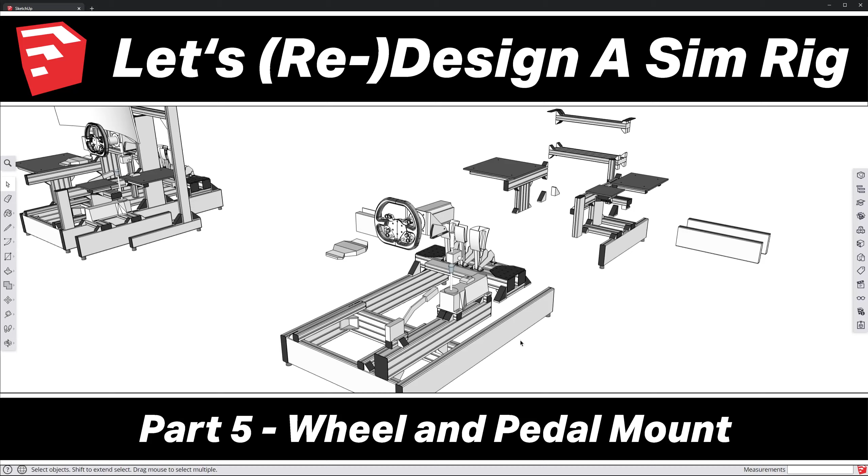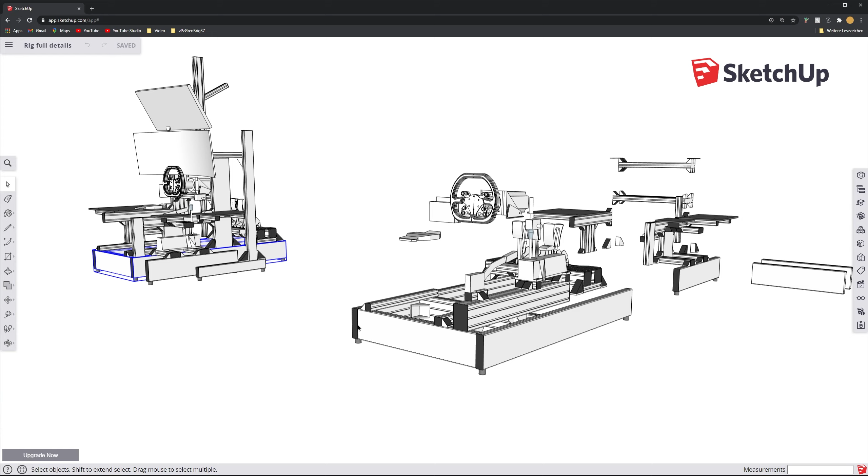Today we will be looking at the mounts for the steering wheel and the pedals. As you might remember in previous episodes, we changed this lower frame from a width of 600 millimeters to 750 millimeters. The goal was to make enough room for this big mounting bracket for both the shifter and the handbrake.

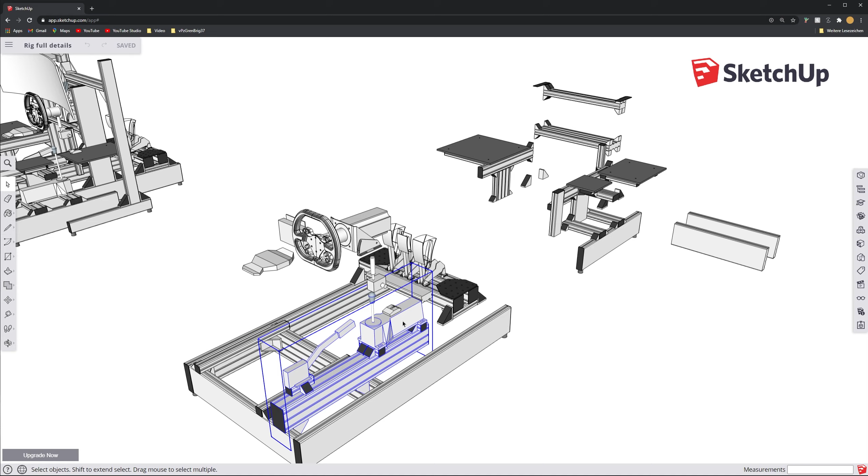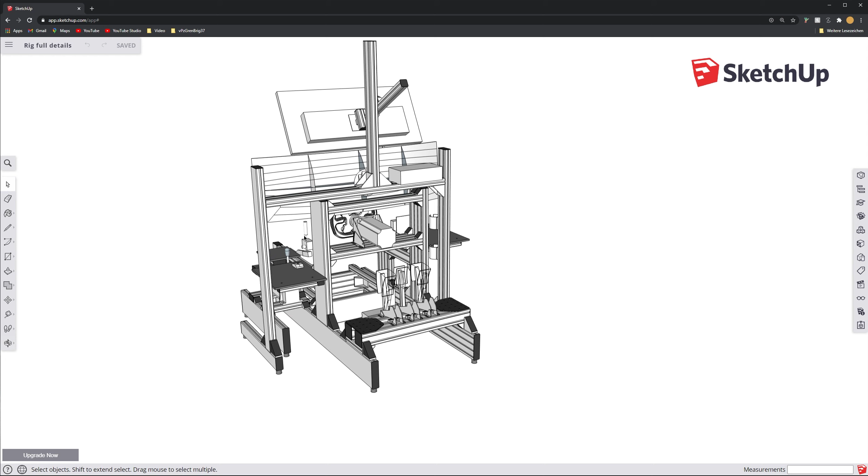Of course, making the whole thing 15 centimeters wider now makes it necessary to also make those mounts wider. For example, this is the current solution for the pedal mount, and it's too small, so it doesn't reach over here. This will need a redesign. Also, if you look here, this is the 600 millimeter width, so this is also too small.

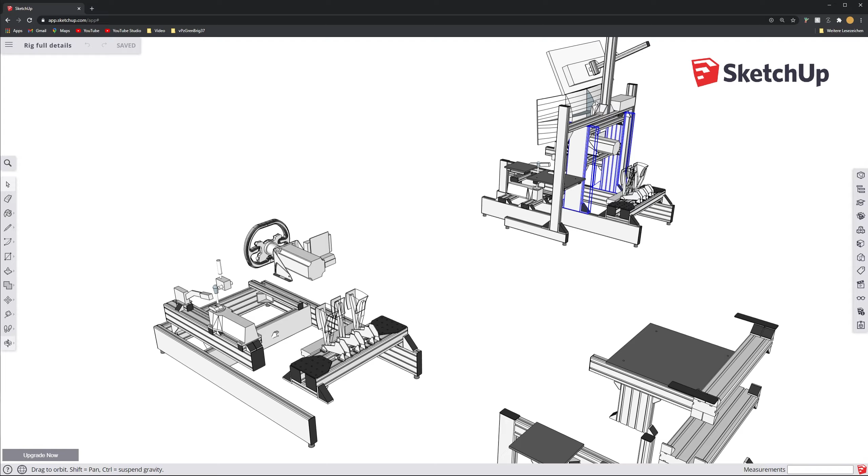Additionally, those two beams I used here are now used for this middle part. So I have moved those here, and I will now have to use basically the beams which were in the middle there for the new verticals. Those two 600 millimeter beams are over here currently.

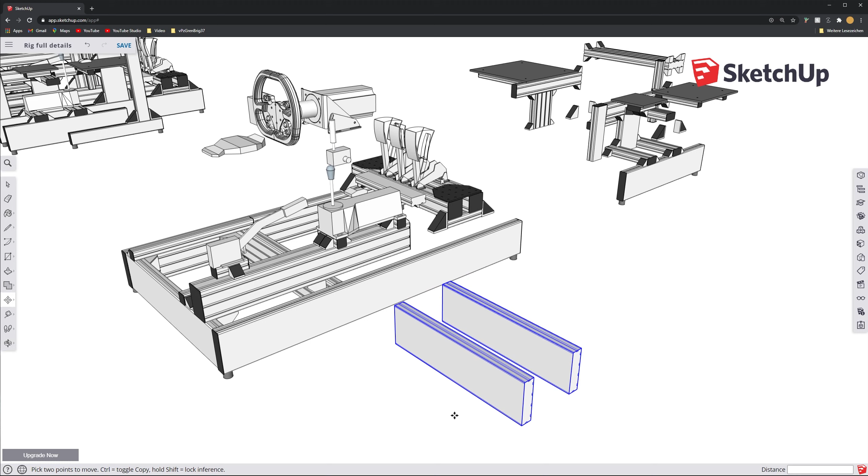I will just grab those and put them a little bit closer so they are a bit bigger for you to see. Then we will turn them around so they are actually standing upright as well. Then I will just turn them around that way, and because they have to face each other, one of them will be turned this way too.

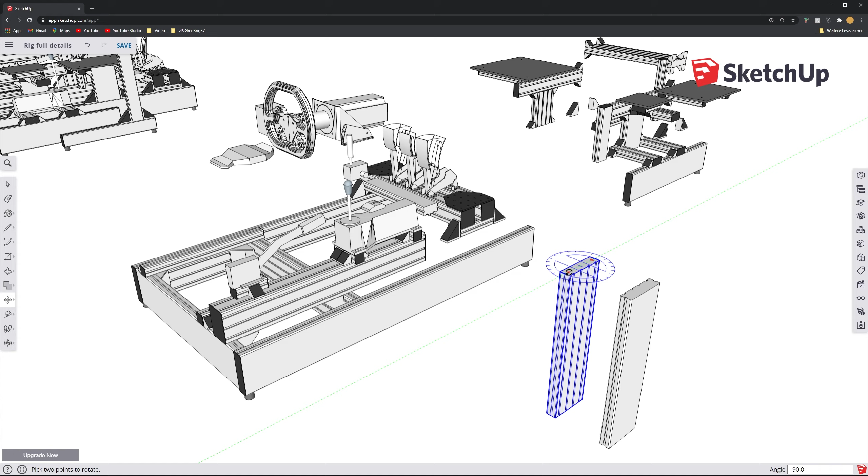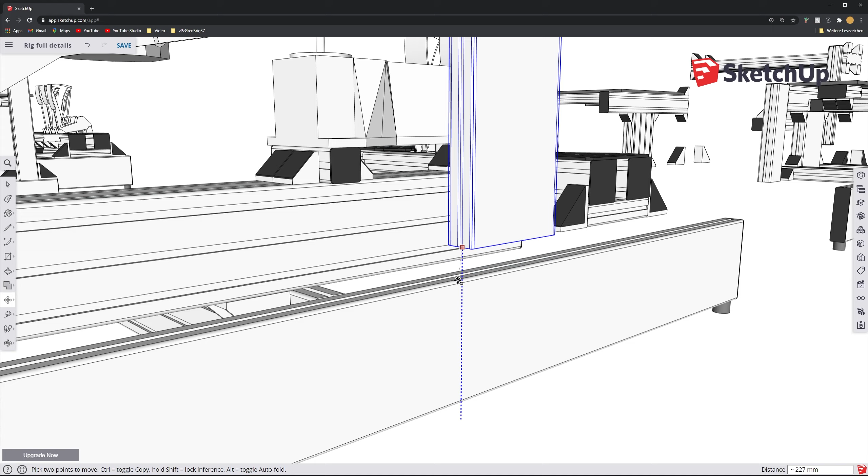Now I will just grab the first one and start moving it into place. At first I will just move it on that surface so it has the right level in the direction which goes into the screen here. And now I moved it up so it sits on top here. And I want to do the same with this one.

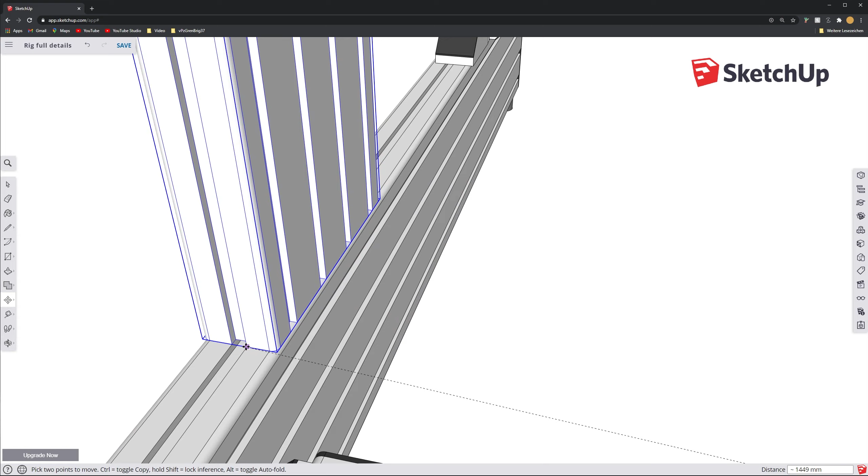Actually, now thinking about it, there is one easier way. I can just grab this endpoint and put the endpoint on that edge. So this will do both things: it will make the correct alignment in this direction, left to right, and in the correct level up, down.

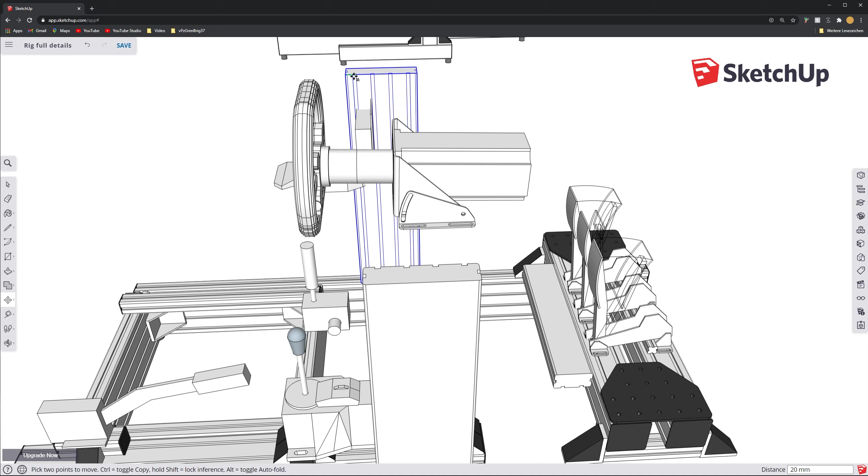Now, of course, they are not on the same level in that direction, but that is also easily changed. Just grab, for example, this endpoint and put it there, and that's done.

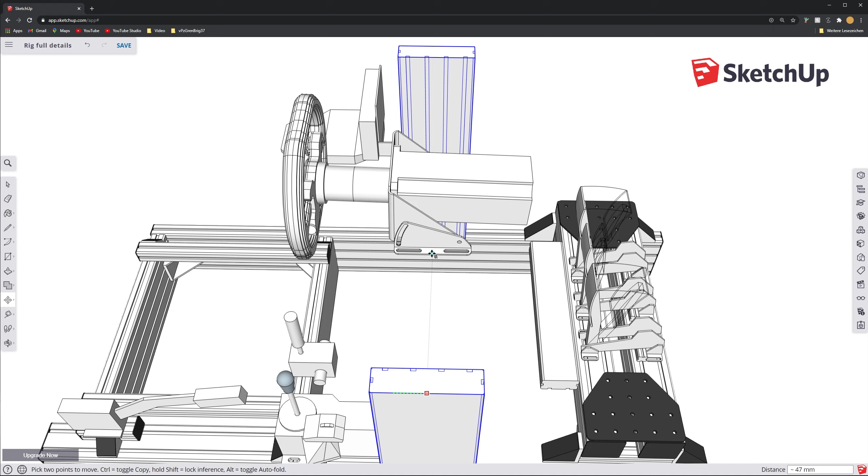Now for the next bit, I grab both of those beams here in the middle, and no, I don't want to turn them around, I just want to move them, and I will move them to the exact height here in the middle of this line.

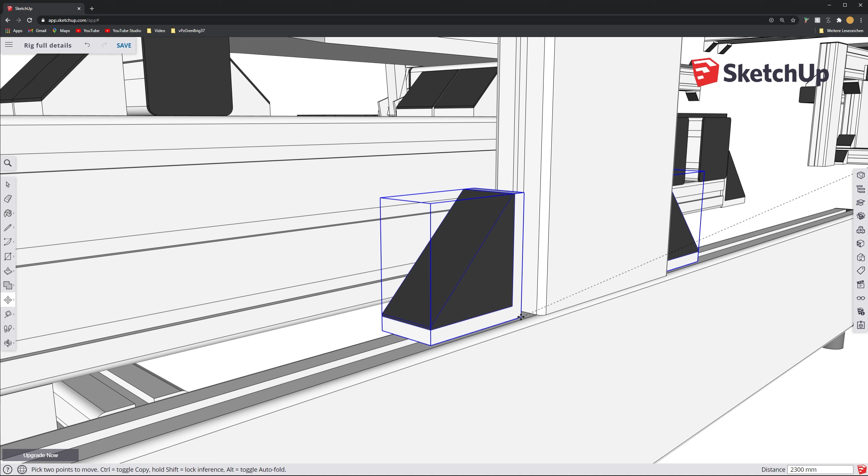So now we can assemble those two beams to this lower frame, and for that we can already use those brackets, which were also used for the same purpose before. I'll just put them on here and then align them in the center up here.

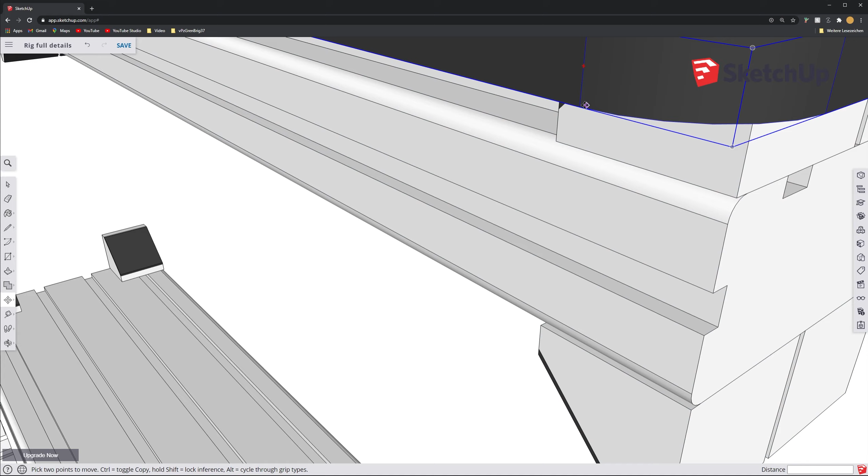And that's already done. Now that I'm looking here, I can also think about putting those end caps on. Let's try and grab that edge and put that edge on that edge. Why is it not doing it? Come on. Yes, like that.

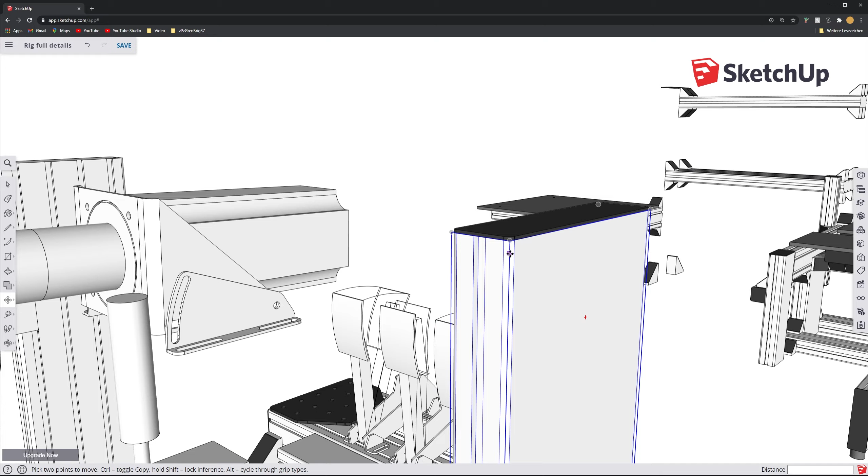So basically I aligned this lower end of that line to the upper end of that line. I will just do the same thing on the other side, if it lets me again. Grab that. Now you can see it doesn't want me to put it there. Yeah, zoomed in a bit, now it worked.

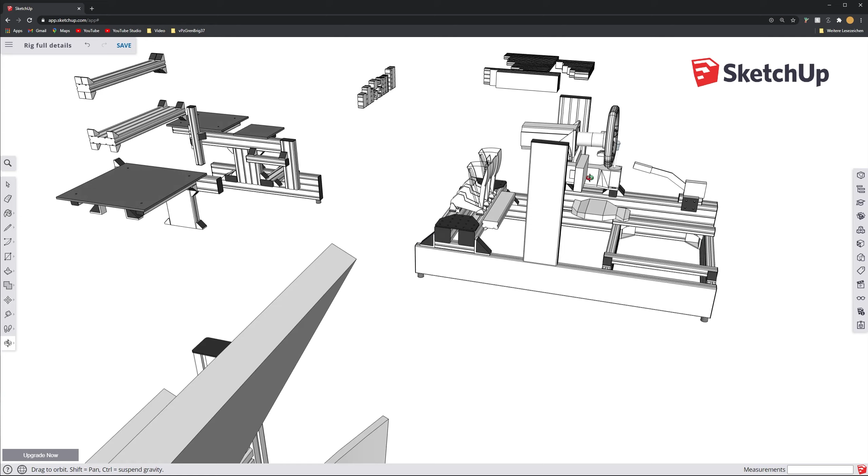And also here we have those two brackets which have to go there basically, and then again a little bit to the outside. So now they sit on there.

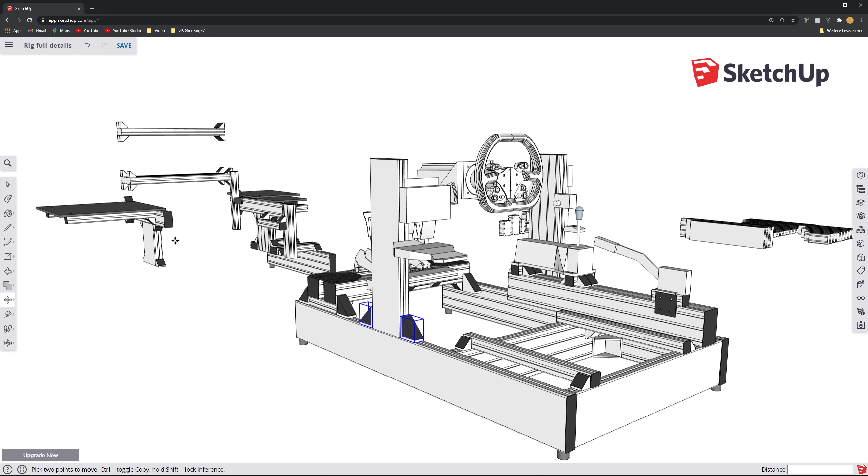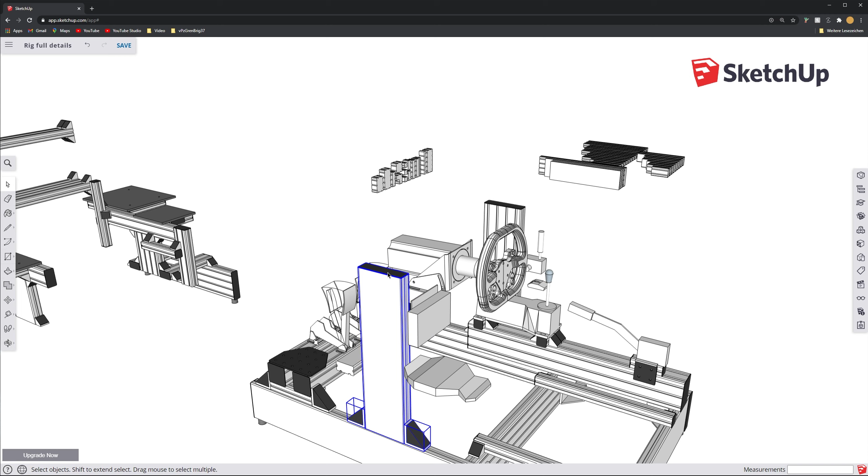One thing I usually like to do is make sort of sub-assemblies out of things like that, because these three things down here—this bracket, this beam, and this bracket—will always move together because they are screwed together here. Also this upper cap is in the same spot.

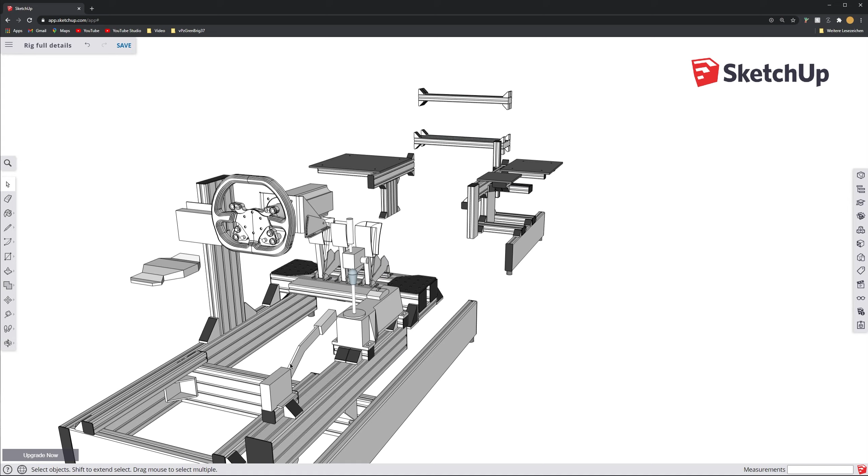For example, if you do this a little bit differently and build from scratch, then you can say, okay, now I have made one of those beams, and then I'll just do that. You don't have it here yet. So you can just use this thing, copy it, paste it, and you will have exactly the same part.

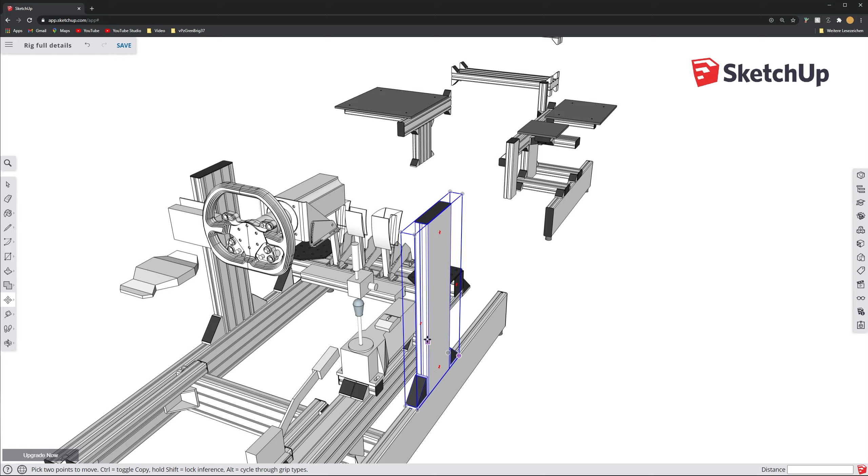Where you can easily make symmetrical pieces, so now you could use the same mount somewhere else if it's more of a general use thing. This makes your life a lot easier if you think about what makes sense to have as a subassembly.

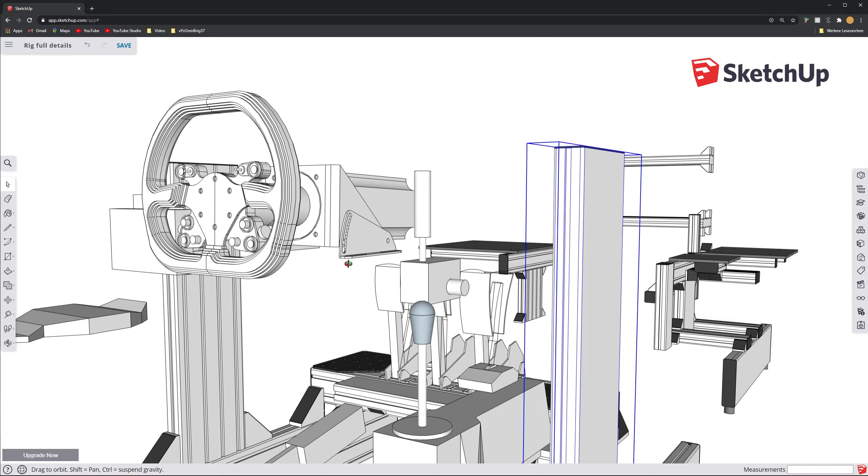Like for example, the next thing we will have to grab now is the beam which goes from this one to this one and which will hold the wheel in place, which is also this one, which is a subassembly already.

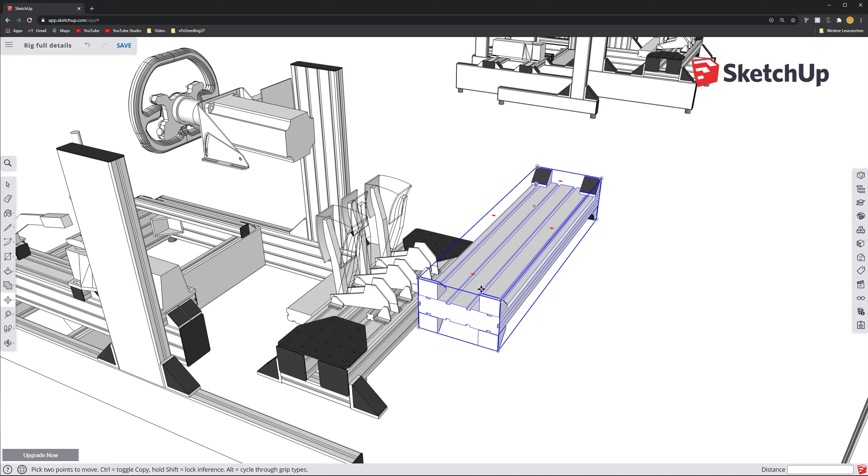So it's a group. In SketchUp, there's no assembly or subassembly—in SketchUp it's always just called a group. Here, this is a little bit special. Let's just open this entity info.

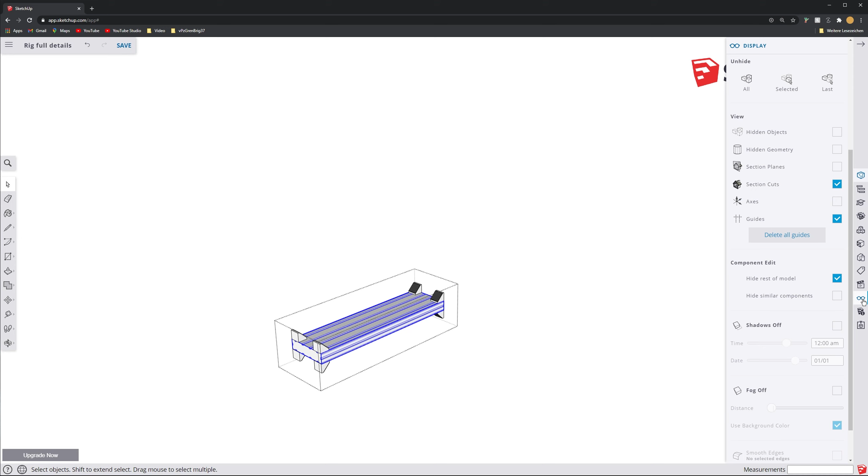Now you can see this group is there twice—so we have it here and we have it here. So we have to be a bit careful about this. This actually has some components, so this is a component where we also have two. If I would go ahead and just change this component, let's just do this to show you like that.

You can see it also changed in the other part of the model, and that's something you often don't want, so you have to pay attention to that. When I go out, I see this model is there twice. So if I want to change it here and keep it the same in the other place, I have to make it unique. Just right click, make it unique, and then you can change it.

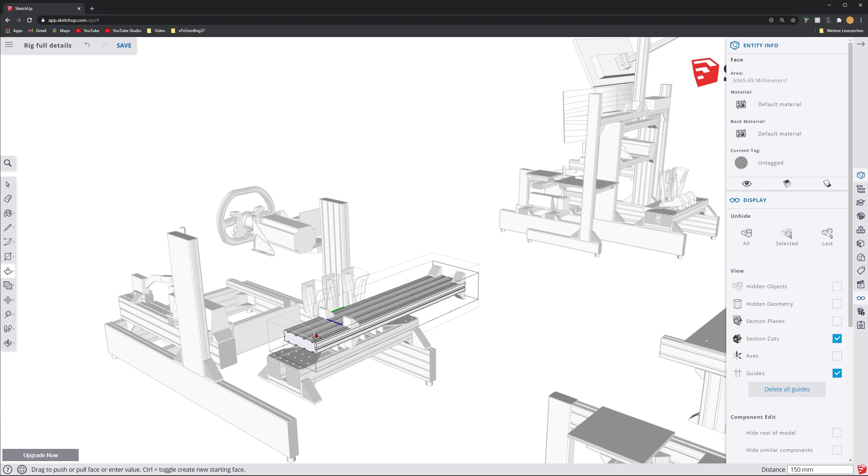As I said before, we changed the width of the frame from 600 millimeters to 750. That's a 150 change, and here we have to change it by the same amount, so this will have to be 748 millimeters. Now that it's a solid component which we only have once, I can just go in there and actually change this. I can type in 150 again, press enter, and the length has changed.

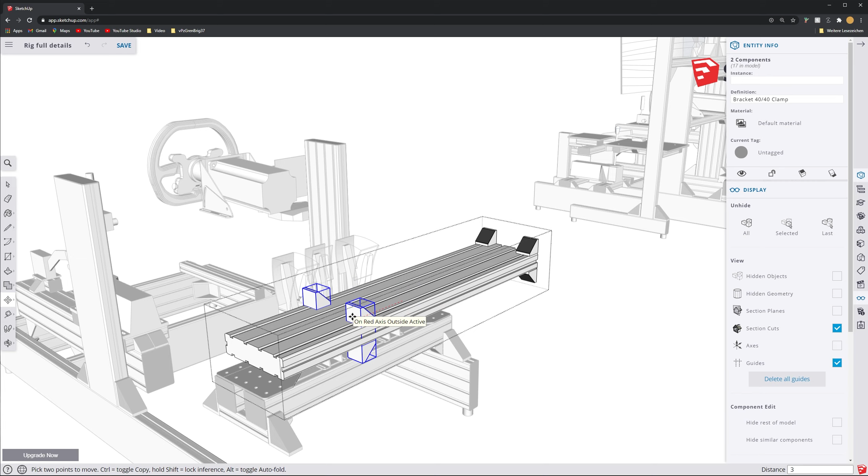Now I grab those two and I will also put those on here. And now I could, for example, say move it 150 out. No, wrong direction, other direction. Now I have to move it 300. Bam, so this has the same effect basically. I can tell it to move 150, or I can use this drag-to function.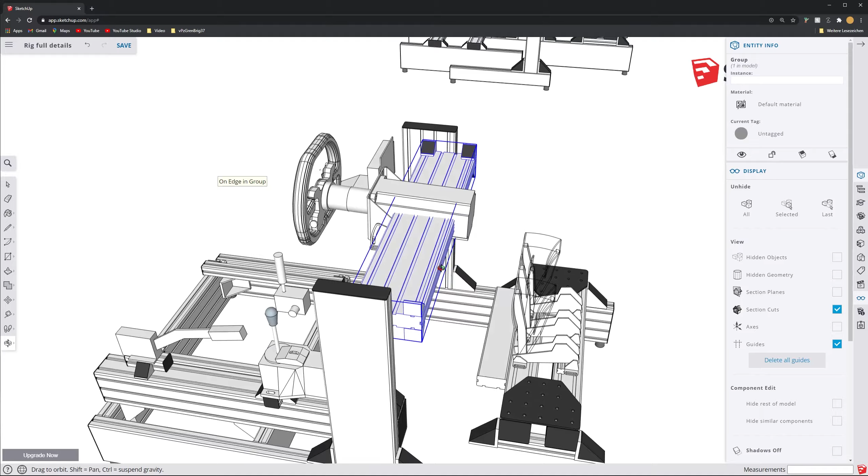Now this is also done, and I will just put it in between. I have selected this corner here and I drag it onto that edge so it's aligned in that direction well. Then I grab this on top and move it underneath the wheel.

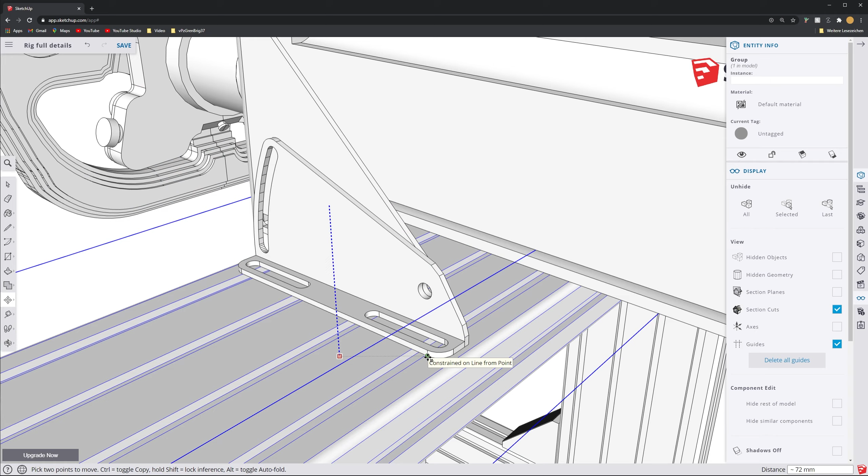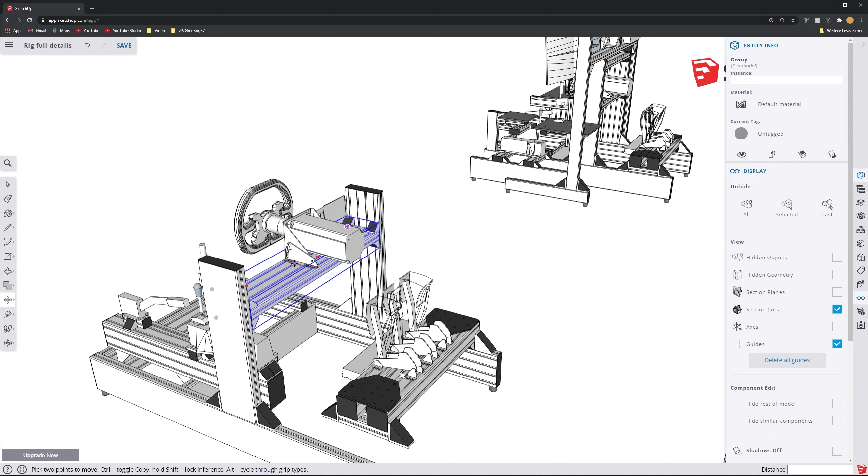Because in the beginning of the whole redesign, I just copied this whole cockpit over here, so the measurements between the wheel, the pedals, and the seat are already exactly where I want them to be, where I need them to be. So I will always just try to move the mounts towards the parts and not the other way around. I will just try to leave all the parts there where they are as good as I can.

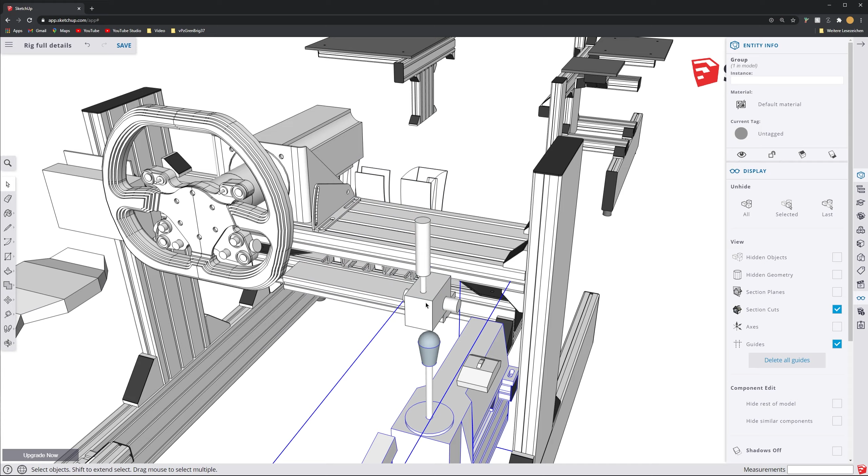Even though I won't be able to do it here, because this is just intersecting, and when you put this shifter in the left forward position here, it will collide. So this is something I will have to move, but I'm not yet sure exactly where I want to move it, so I just leave it there for now.

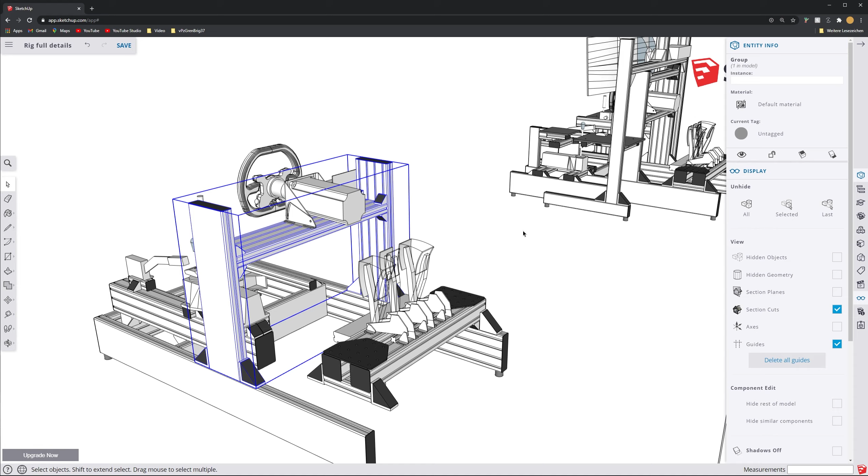So this was the part on that, and now I will also make a subassembly of that one, so make a group. And we're done with the mount for the steering wheel.

As I said, I also wanted to do the mount for the pedals, and we're good on time, so I will at least be able to start it.

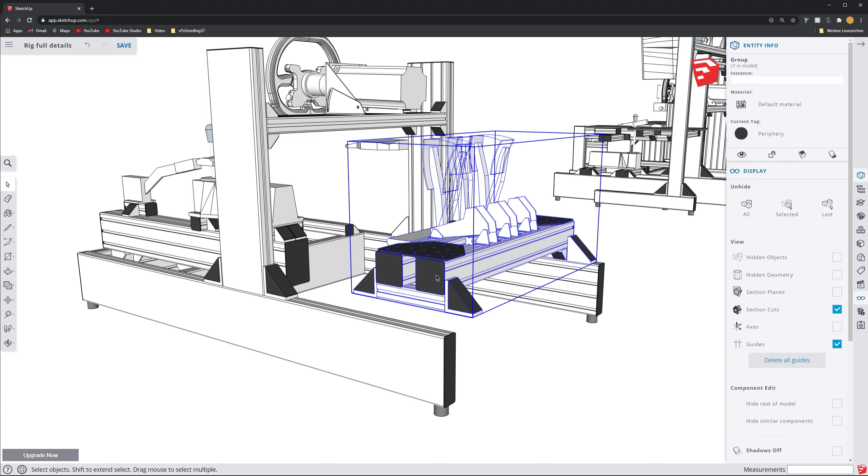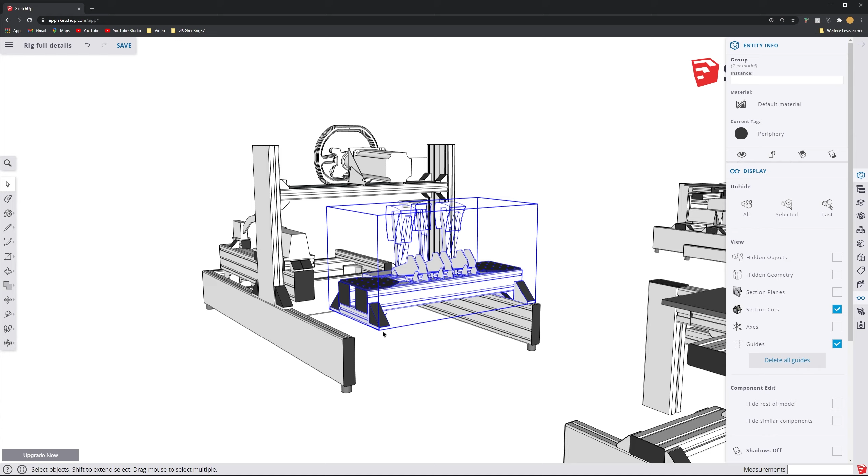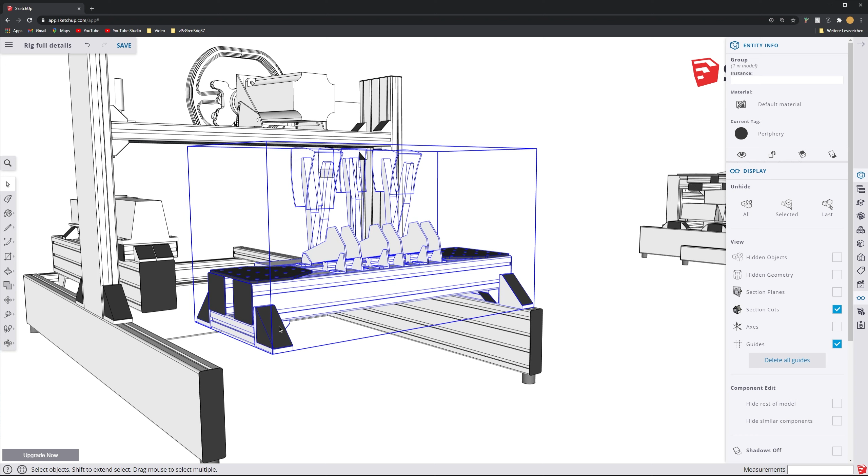And here, as you can see, this is a bit of a suboptimal solution, because at first my plan was to put this 8 centimeters above the frame height. So I had just those two beams here, which are 80 by 80. Then when I used it for a while, I realized it would be nicer to have it 40 millimeters more up. So I added this 40 profile here, and a 40 millimeter profile there. But yeah, this just adds extra parts and extra complexity, and chances to mess up during assembly when you don't exactly hit the right place, or when it's not exactly straight or not exactly 90 degrees.

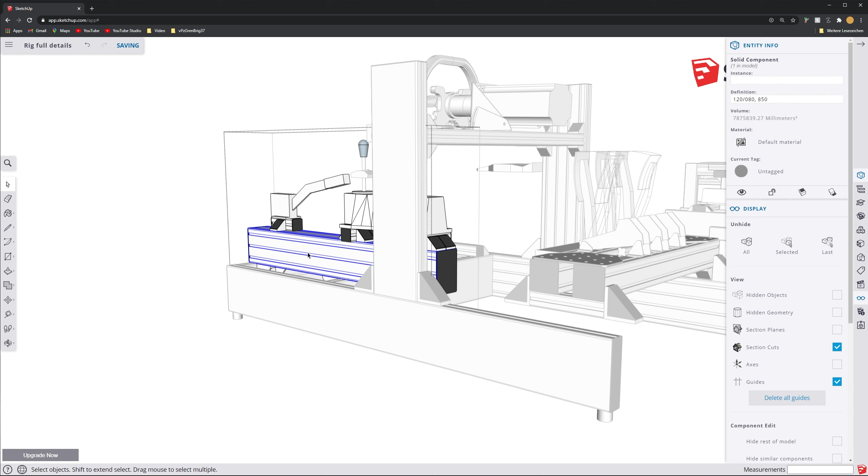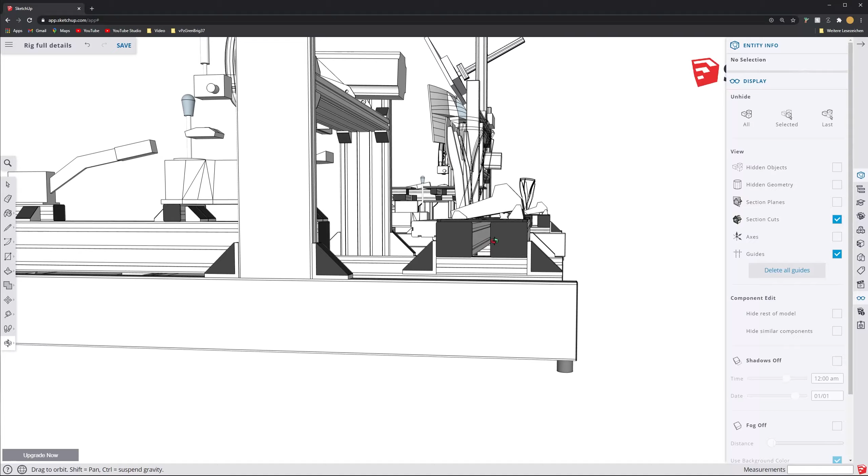So I want to get rid of that. To get rid of that, since I will already have to order this beam to change the cockpit, I will just order more of this beam and use the same dimension here. So this is the 80 by 120, and I will use 80 by 120 here, even though maybe you could do a more lightweight solution if you combined different heights and dimensions. But I will just get one big beam, or rather two big beams, so I'm on the safe side when it concerns stability, and I won't add too many different components.

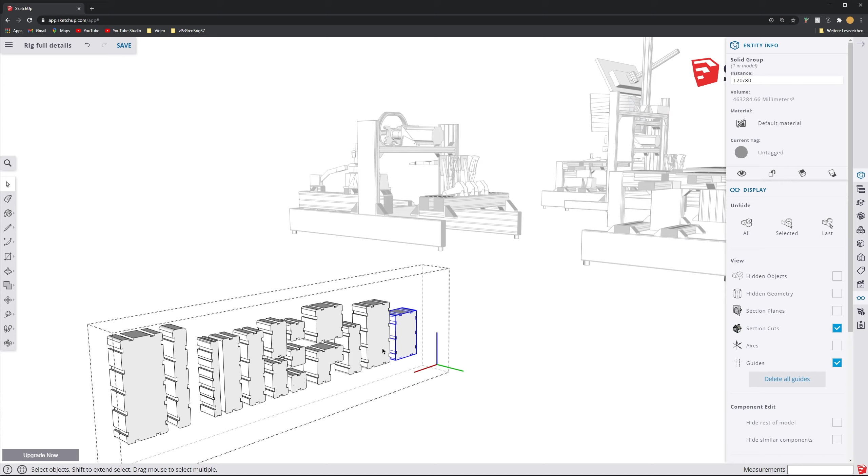But yeah, enough explanation, let's just go ahead and do it. Since I don't have this type of beam in my model anywhere, I will use this template again, and I will just copy it there.

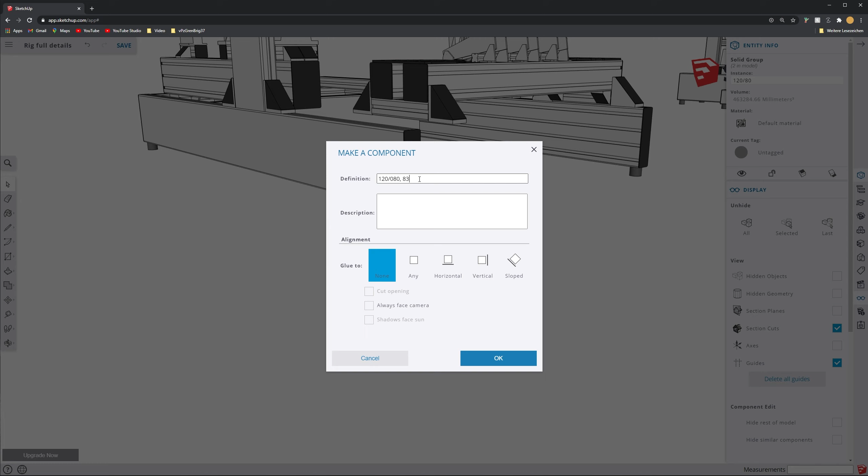Now I want this basically to span from that edge here all the way over there, so I can just quickly measure how long this has to be. It has to be 830 millimeters. Now I have to make a beam that's 830, so I will make a component here. I will give it the correct name so I can identify it, and then I can change the actual dimension.

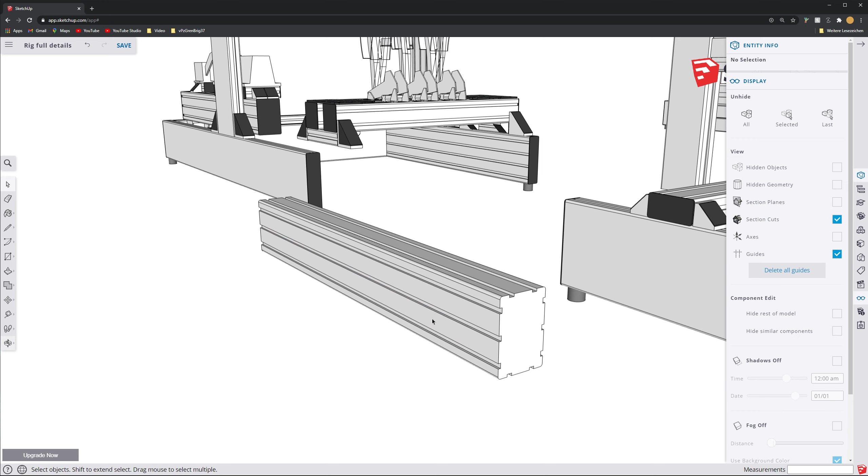This has to be extended by 780. Then you can quickly check if you did it right by clicking one line, and you will see this edge has a length of 830 now. So that's correct, that's the 830.

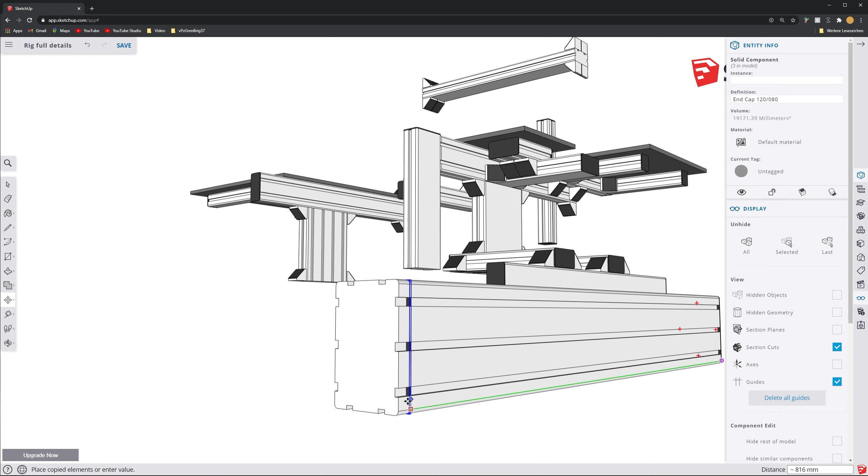Now I want to put end caps on there. So I do this right now. Grab this here, then I grab it there, copy it, go to the other end and put it on there. And I can already basically make this a group,

because I will need it twice. Copy it, paste it, and here we have it. Let's put this exactly on the edge.

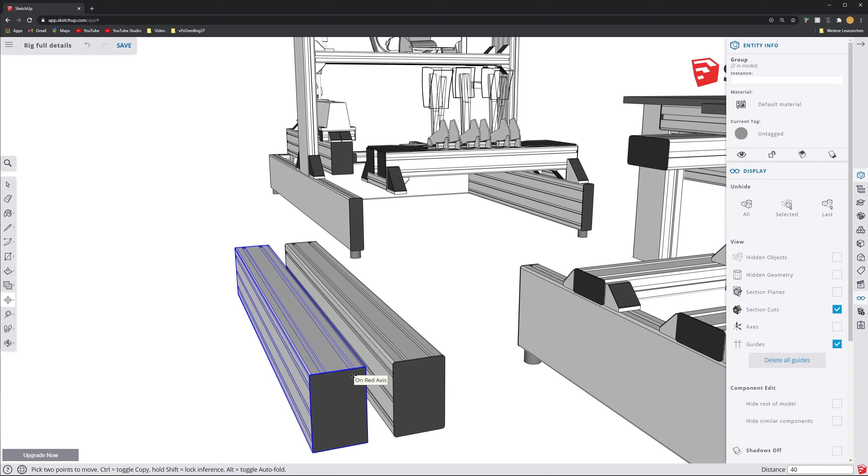And then I don't want to turn it, I want to move it that way 40 millimeters, because the gap in between here is exactly, as you can see, 40. Because everything is held in place by this thing here, and then the distance between those slots is basically not possible to mount in a different way on the profiles than having this distance from here to here, 160.

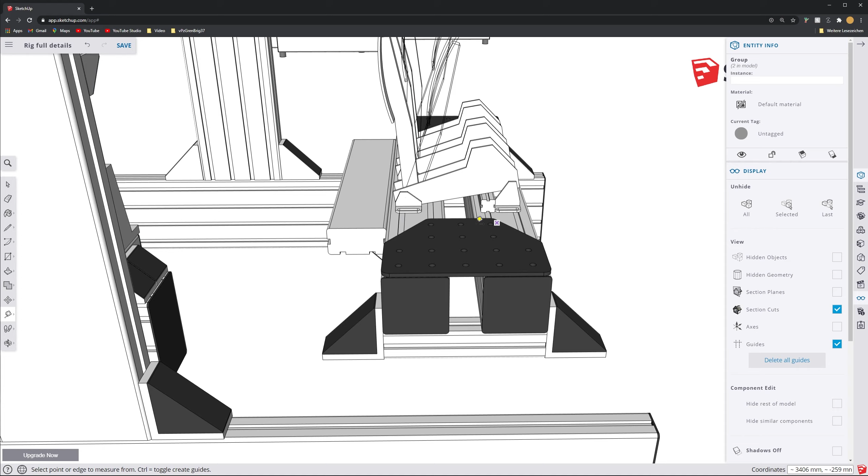I think there is one kind of profile which has this width, but that's then only 20 millimeters thick or something, so that doesn't really work. And that's why I decided to go with that.

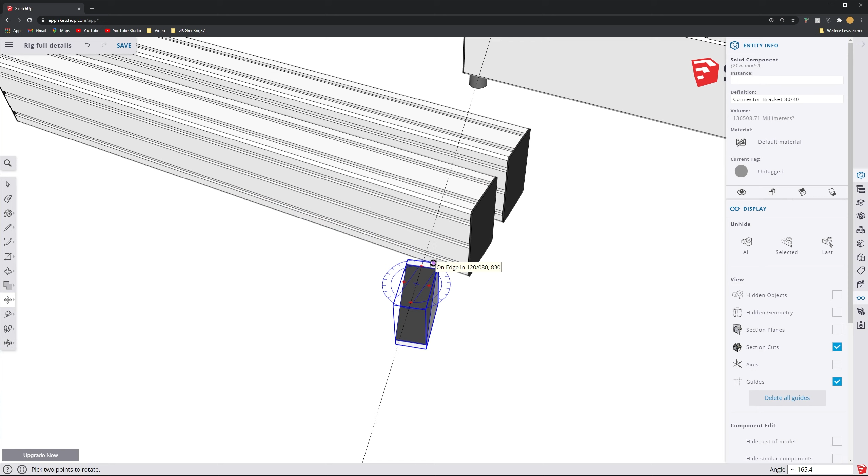Yeah, so now let's put those mounting brackets on here. So I just place one, then turn it around, move it onto the part. Which way around? Yeah, I'll just put it on this side first, and then I can copy it to the other side later.

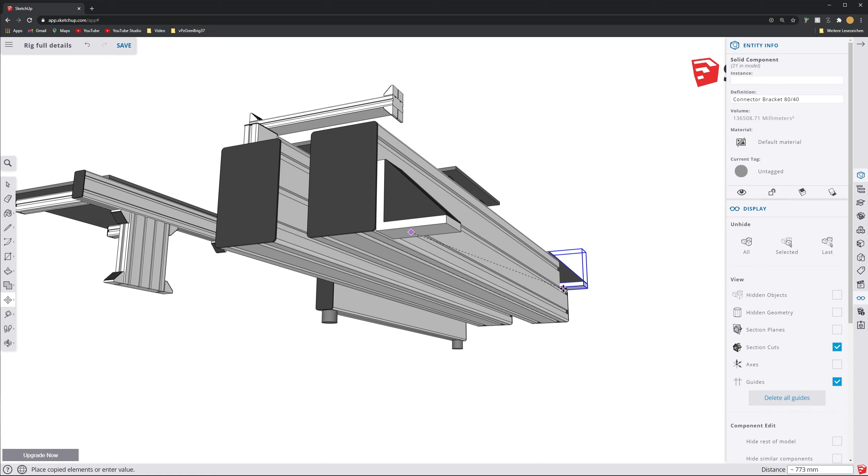Make sure it's aligned perfectly. So now this can go over there, and I want to turn this because, yeah, I kind of don't like having this asymmetric design. So I will make it as symmetric as possible, not asymmetrically as possible.

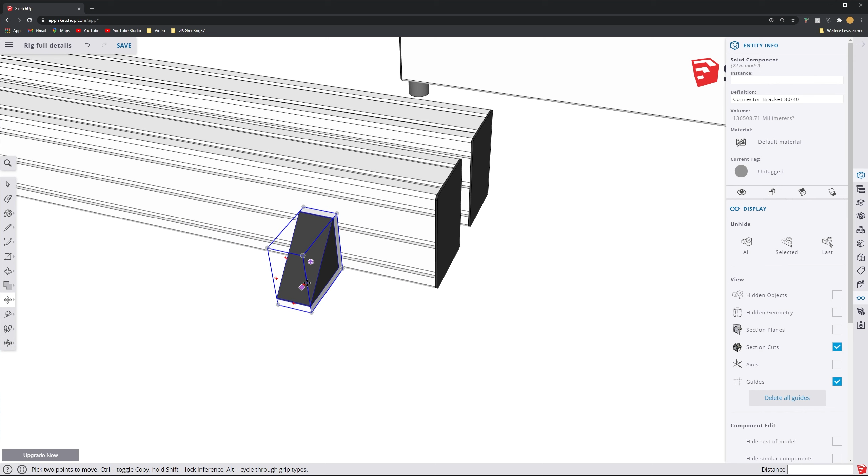So yeah, now I put it here. I will have to make some more detailed alignments when I put it on, but for now it's okay. Put this on here, and then I will turn this around like that.

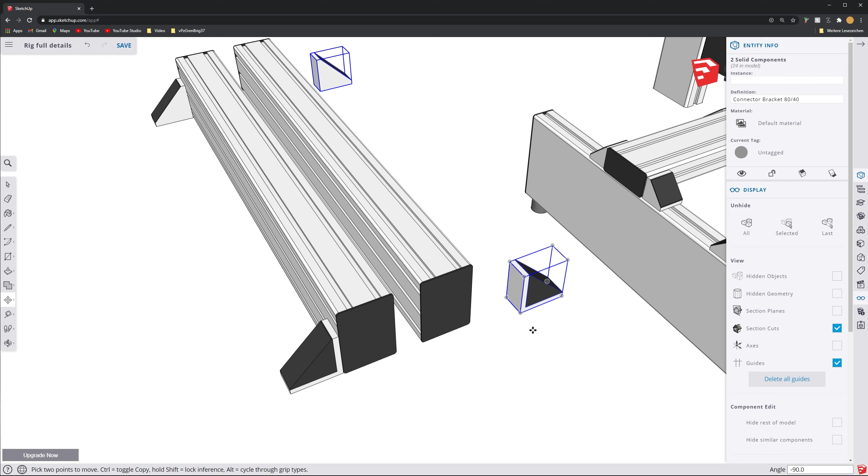Same height there, and on that surface. So that's basically the mount with those two beams.

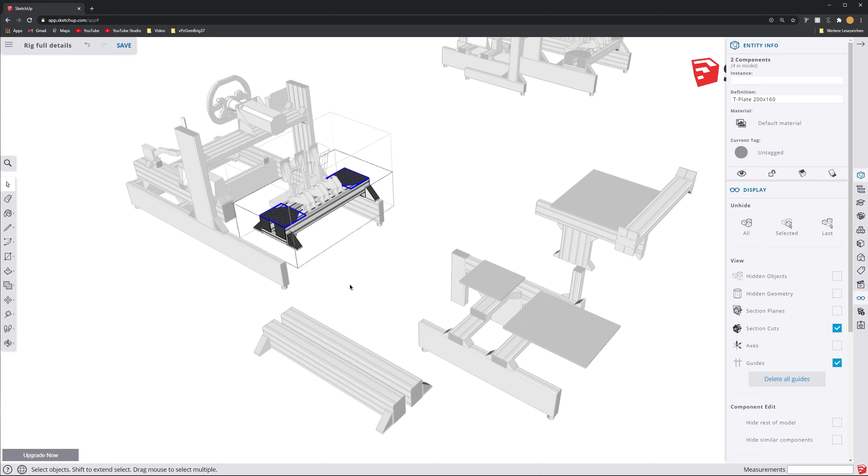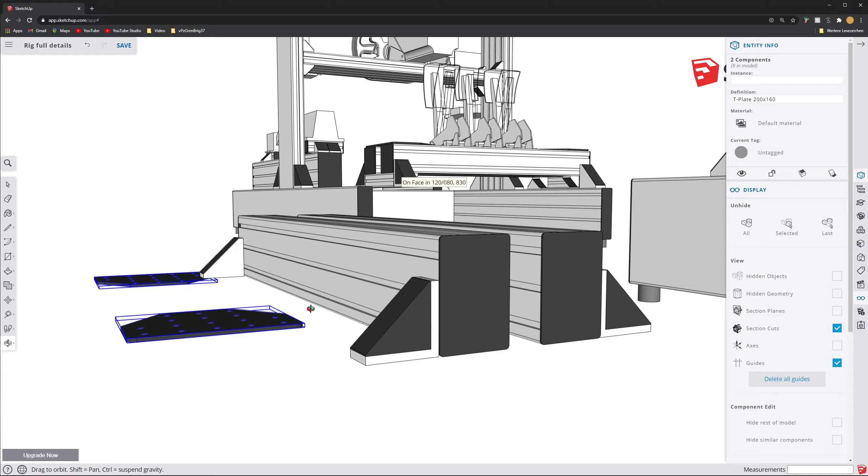And I want to put those plates on there again, but this time I want to put those plates on the lower side, basically. I don't want to have them on top, I want to have them sit underneath. Grab this here, and I will put it directly underneath it. And now I will have to do some aligning magic.

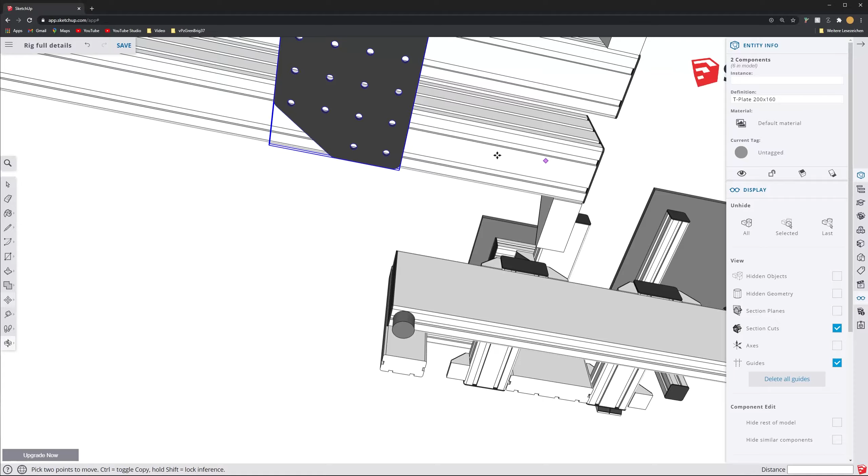So I will go in here, grab the center of the hole, and I will put this center of the hole on the center of the slot here. So then it will sit perfectly underneath those slots.

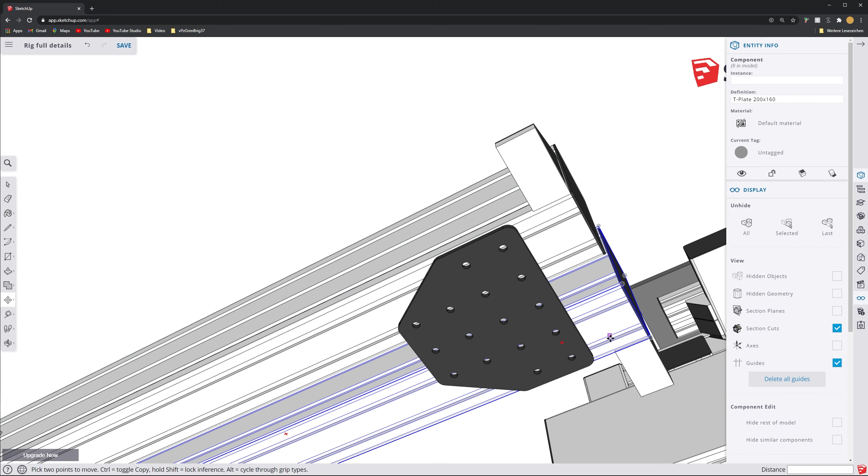Now I just grab one of those, first I put this on the edge here, and then I put it in by, let's say, 60. So we will have this 40 millimeter frame there, and then a little bit of a gap, and then this bracket.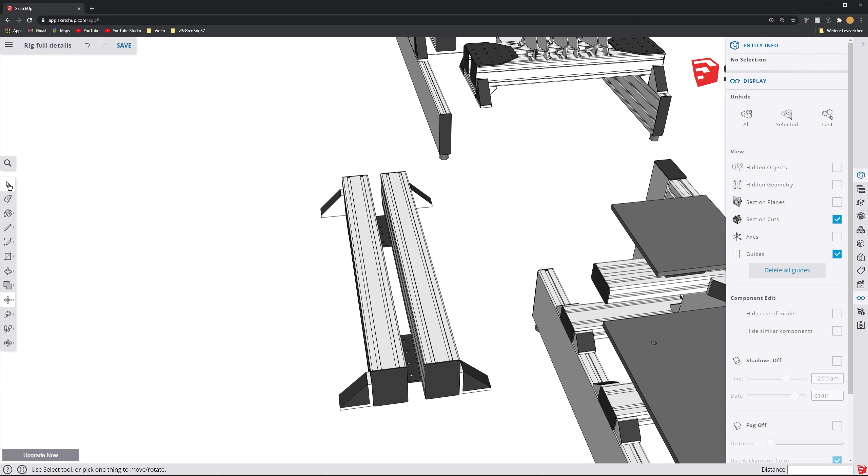Here I do the same. Put it on there, and then move it in by 60. So this is basically now this bracket completed, or this pedal mounting beam solution version 2.

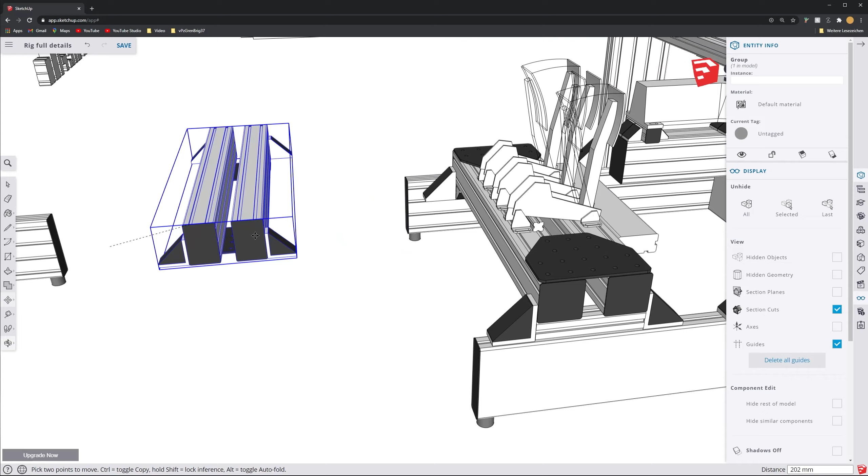Short and simple name. Make a group out of this. Now I can turn this again, and I will just move it in here so you can see basically what I'm going for.

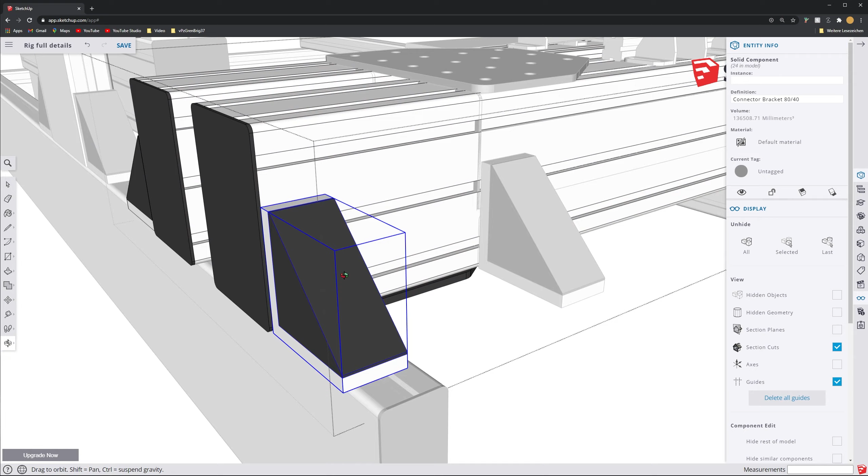Grab this probably and put it on there probably. And probably this looks nice, probably. So now here you can see how those brackets are not perfectly centered. So I can just go in here, select both of those. Yeah, and you can see this doesn't really align.

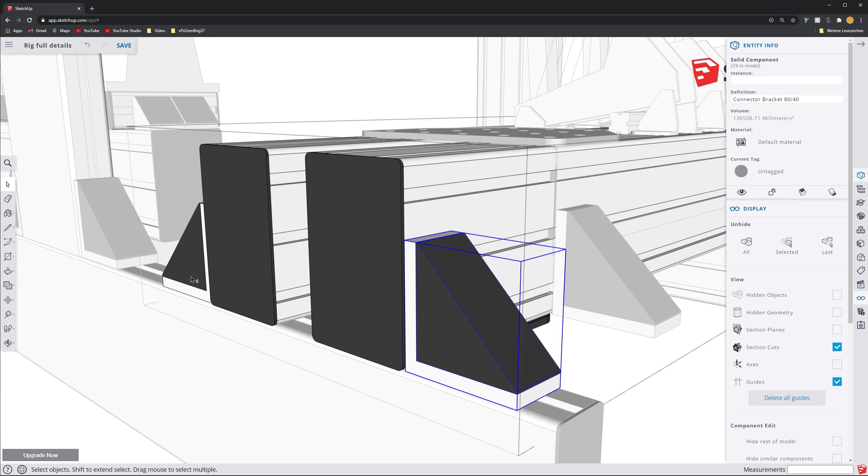Grab that edge, put them on there. Grab these two. No. Grab these. Like that. Put them in the middle here.

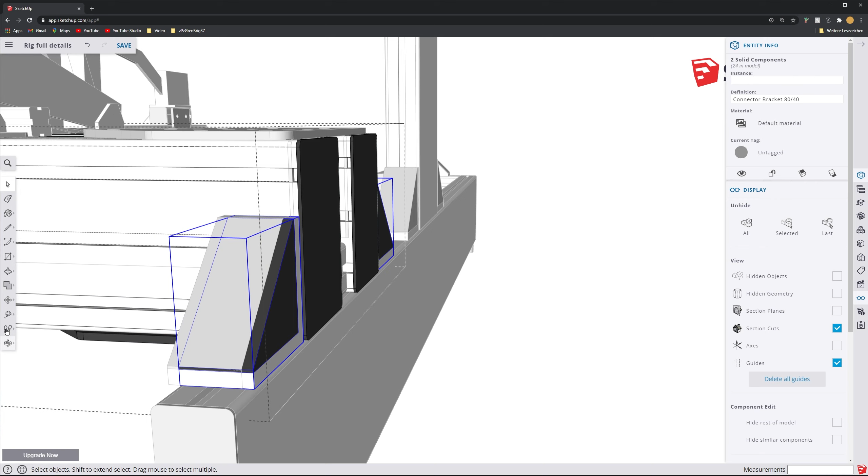And here I will basically do the same. Grab those two, and put them on the middle there.

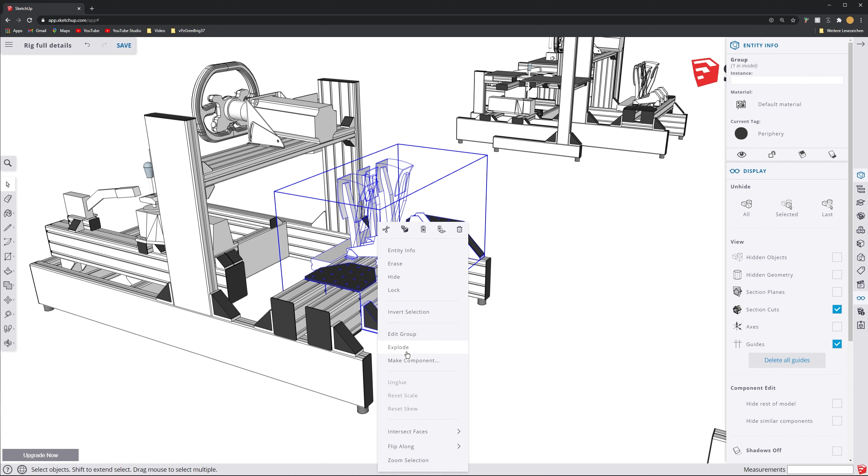Yeah, so now you can basically imagine what this should be looking like. And I could just go ahead and go in here and basically move this away. Let me explode this, and then I can move this away, and I do it by 500. So I can easily move it back under there if I want to compare solutions, for example.

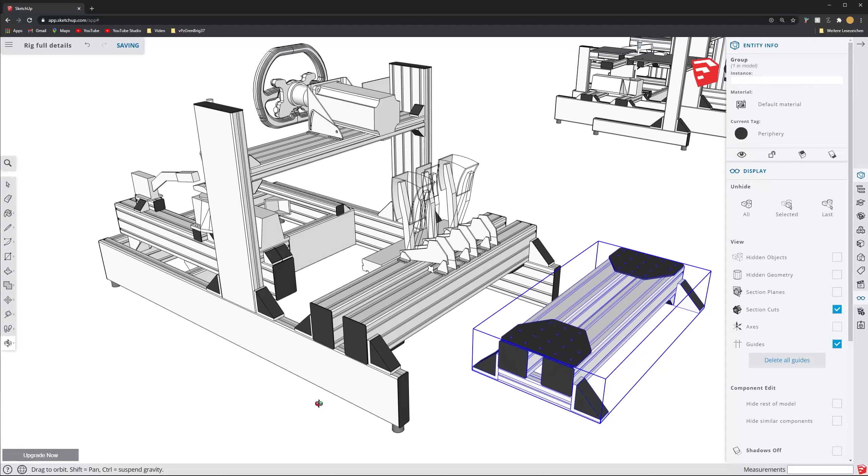Yeah, but this would then be how the new pedal mounting solution could look like. Let's just wrap it up for now. This would be one possible solution to mount the steering wheel and the pedals.